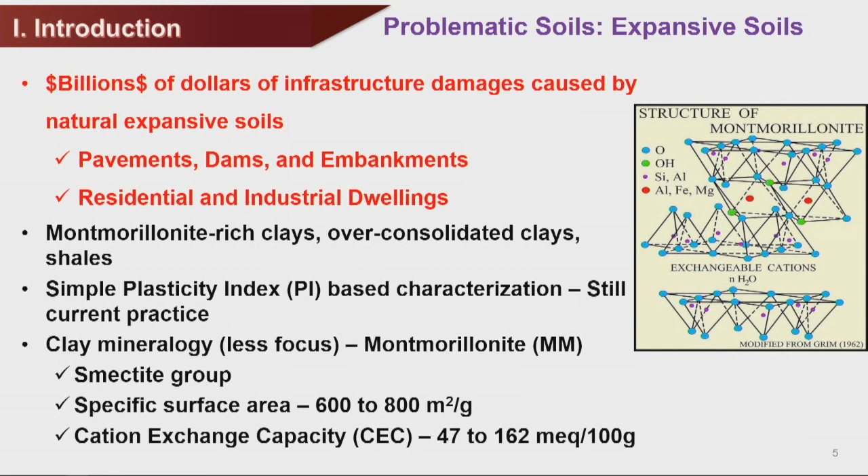So you're going into soil chemistry. The one that's very important is the montmorillonite mineral, which is part of the smectite group. You see the specific surface area, how big it is - a few grams can spread across a whole football field. You'll get this from the Mitchell and Soga book, which is very true with this material. So anytime you have a montmorillonite mineral in your soils, you are talking about some extreme problems, and high cation exchange capacity also. So these are some pictures.

A lot of times people ask me, 'Anand, do you think I should buy a home in this region?' I say most engineers can address your problem, but it's better to drive around to see what type of roads you have, then you get an idea whether it's a bad area or not. If you do have a bad area, you don't stop buying there - you can still come up with a better foundation. In fact, that's what I did for my own home's foundation - I was able to improve it a little more by doing some testing in my lab. So I'm very proud of that.

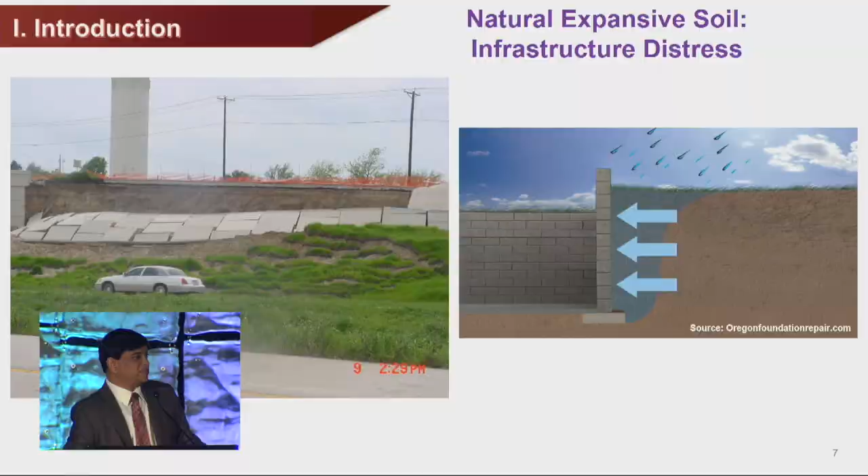One year we had a wall on I-30 near Dallas that moved a few inches, and Barry Christopher was involved in the design and the investigation. That lane was closed almost 4 months and was a tremendous problem because it caused a lot of traffic delays for morning commuters going to Dallas. Again, this happens because of the soil behind there causing swelling and movements.

Unfortunately, the repairs are very simple - they just push the soil back, compact it, and leave it. Then in 2-3 years you'll have another skin slide again, so it's not a very good permanent solution. So we did some research with the Army Corps to address this problem.

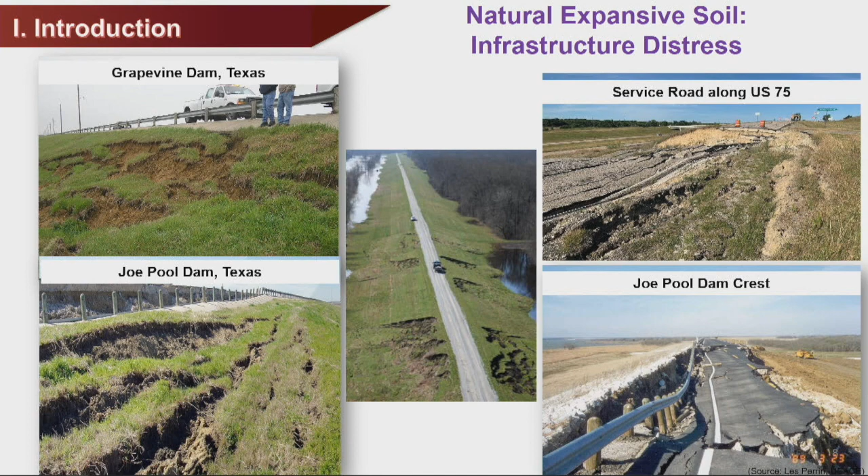So the one you see on the right-hand side is Joe Pool Lake. That crest completely collapsed several years back because we had cracking. The cracking went all the way to the crest, and it caused the failure of the road on top of the crest of the dam.

And then there's another type of expansive soil. This problem was first mentioned by Professor Mitchell in his Peck lecture, and also in his Terzaghi lecture, where he talked about parking lots in Kansas having this heaving. Subsequently, a lot of other folks have done work on it, Hunter, Little, and several others.

So basically, this one came from sulfates. If you happen to have any of these sulfates in your ground and you stabilize them with cementitious materials like lime or cement, instead of making them less expansive or more strong, you're actually making it worse. These minerals will react with your soils and form a compound called ettringite, and that ettringite is a very, very expansive mineral. It can lift even concrete pavements badly.

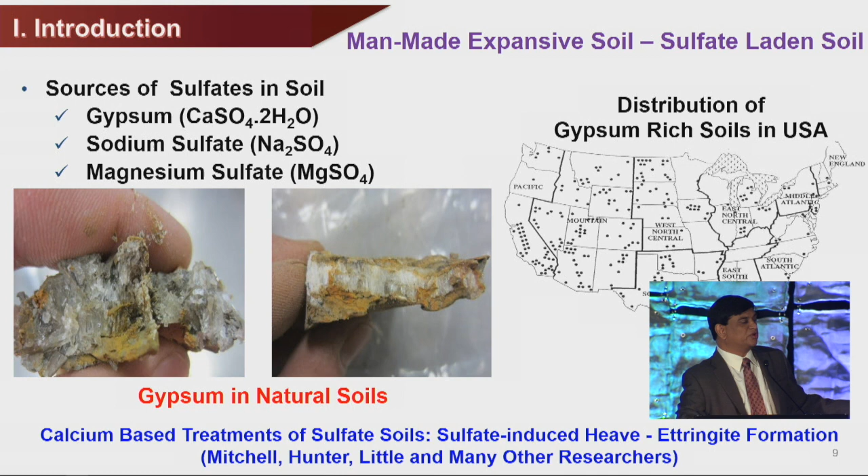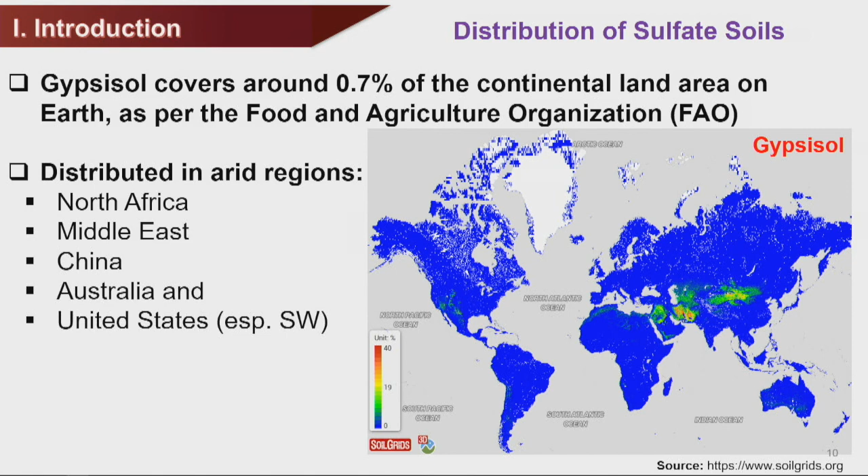I recently gave a talk in Paraguay. Some parts of Paraguay have a lot of these gypsum soils, so the roads built there have huge amounts of heaving problems. Some of our research in Texas is actually addressing this issue. Again, this is not just confined to the U.S., it's a worldwide problem. You can see gypsum soils all over the major continents. Later I will show you more.

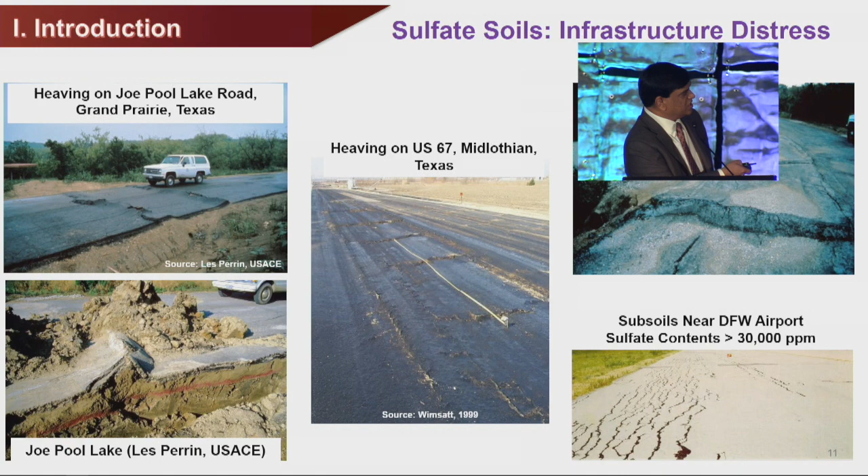But this is some of the pictures of this sulfate heaving, what we call it. You can see here in this picture, this is just during the curing process. There is a small heave that happened right after a few days, in this case 3 days. So the heave actually is your sulfate heave. They go back and rework it, but it can restart again.

This particular one is the Joe Pool Lake Road. Again, this road is an Army Corps road. It's not a very thick road, but within 6 months, this was damaged. They had to spend $400,000 to repair this road.

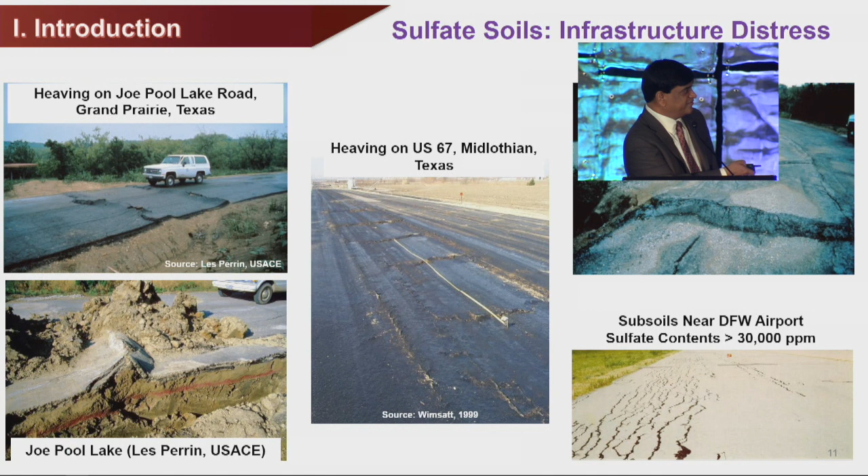And this is not just roads, even runways have this issue. This is DFW Airport taxiway. The taxiway has a lot of cracks here, a lot of differential heaving, all happened because of sulfate soil. So again, this is another major expansive soil, but I call this one man-made because it came from stabilization of the soils with cement or lime products.

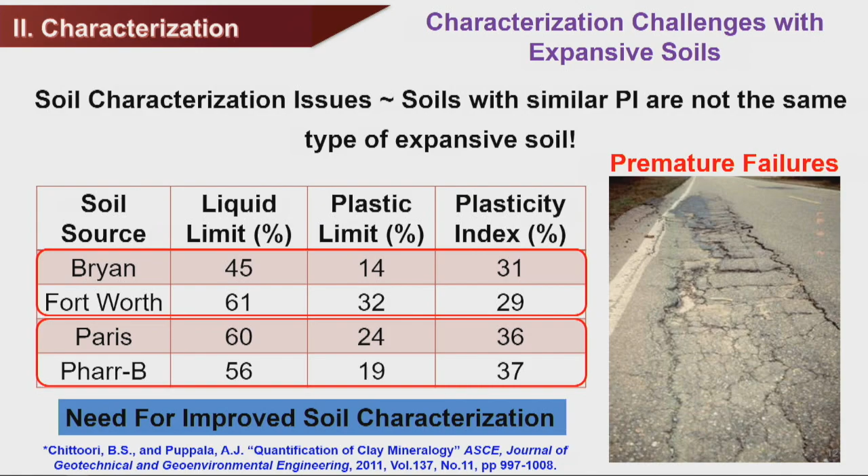Same thing, two soils here. This soil source came from different districts in Texas, again Bryan district and Fort Worth district. Later you will see these are not the same soils, they're different. That's something based on clay mineralogy I can tell, but if I just do plasticity index, I completely miss this picture. So that's where I think it's important to show that we really have to improve our soil characterization.

So this is the second topic of my focus. One of the things we did is a 3-year NSF study, and a couple of students here, Bhaskar Chittoori and Anand, they all did this work. Part of the work was done with Arizona State University, my good friend Claudia Zapata, as a collaborative project.

So what we did is we took several soils and looked at their clay mineralogy, and you'll see how we did that. Then we also did mercury intrusion porosimetry. And then we did on-site testing on the soil water characteristic curve, which is important, you will know how the moisture is propagating or flowing through your soil.

And then we did the macro testing of swell properties. Again, there's a lot of fundamentals involved here. We are looking at the micro level, porosity, and how the clay mineralogy interacts with water, and how it causes swelling.

So this is the thing. One of the things that came up is we came up with some models. This is more intensive work because you have to include some additional testing, but in my opinion this will help. Unfortunately, most of the time when we have a failure we do it forensically, we do all these things. We don't do it at the time of beginning of the design.

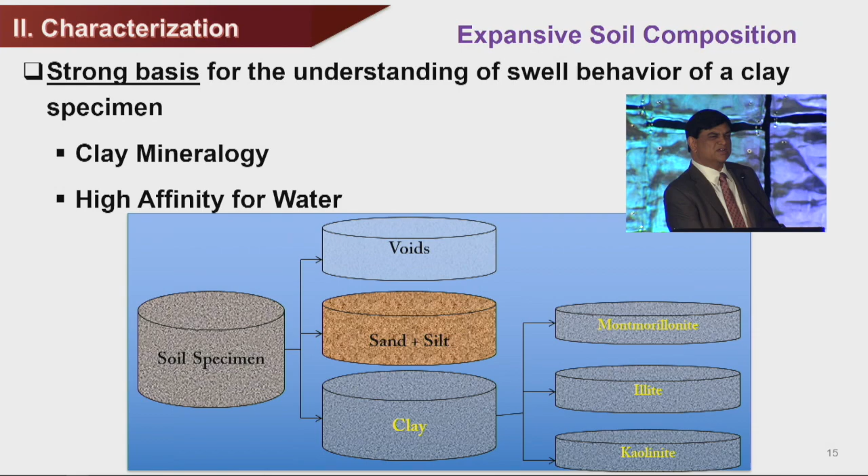As you know, this montmorillonite is highly swelling. This is low swelling, so you have different swelling index. So if your soil is rich with montmorillonite, obviously you can expect swelling. But if it is rich with illite or kaolinite, moderate swelling. But mostly kaolinite, predominantly, you do not have a major issue. It won't be a swelling mineral, swelling soil.

So the one thing we did is with Bhaskar, he's now at Boise State, we looked at this mineralogy. And this came from Mitchell and Soga's book. They have identified the range of properties. So you can see all the cation exchange capacity, specific surface area, and potassium.

One thing I want to mention here, the potassium main source is, again, for illite, comes from potassium. And that's what we thought. But believe it or not, there's another type of feldspar, which is potassium feldspar, that can contribute to kaolinite. So we had to make some corrections later. So initially, everything we thought potassium is going to lead to illite mineral, but there is some part of potassium - this is from my geology friends - I learned it can actually come to your kaolinite also.

But it's a very small amount, and very few places have this potassium feldspar. Unfortunately, Dallas geological formations have potassium feldspar. So I had to go back and make those corrections.

So basically the equations are straightforward. You measure these three properties: CEC, SSA, and total potassium. And again, we have published quite a bit on this. If you are interested, please send me an email. I'll be happy to share these procedures.

So then you solve these three unknowns, because the unknowns are kaolinite, illite, and montmorillonite, and then you get the three unknowns can be solved. But if you look at it here, there's a range, so you do not know which ones you are. So we developed an optimization Microsoft solver program. That solver program can feed your measurement data, and it will provide you approximate mineralogy.

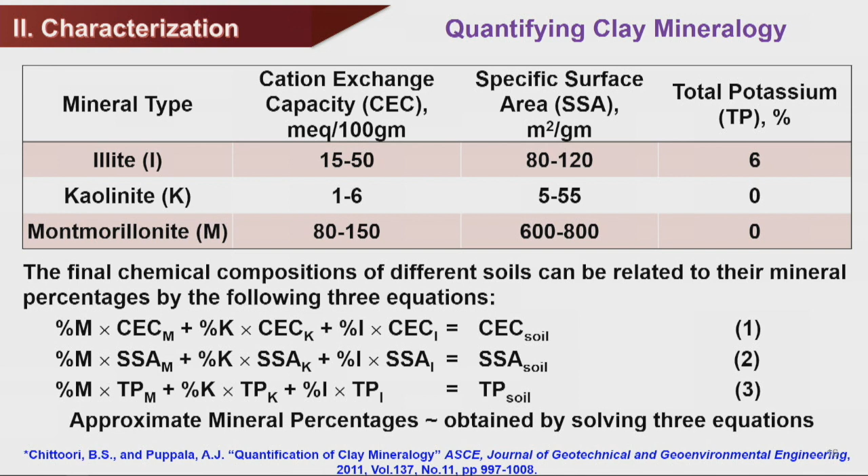Using these three properties, so we have a way to measure it. There's other ways you can do it - you can do X-ray diffraction Rietveld analysis. There are several folks who use that. Again, in my opinion, this measuring of chemical characteristics is a little bit more rigorous, but it also provides you more reliable information.

So some of the models we did, like one of the models I'm showing you here - what we did is we looked at our clay mineralogy, or chemical mineralogy fraction. So what you see there is the equation. This is the only few equations you'll see, you won't see that many equations, but basically we looked at the clay fraction here.

So this is our swelling factor. As I said, most of the swelling comes from montmorillonite, that's a 90. Illite is 9, kaolinite is 1. So if you take 100, we normalized it 90 to 1. So basically, if you have high montmorillonite, the swell factor SF is high. So that's our parameter for what we call the chemical parameter. The second parameter we included is, again, the mechanical hydro parameter.

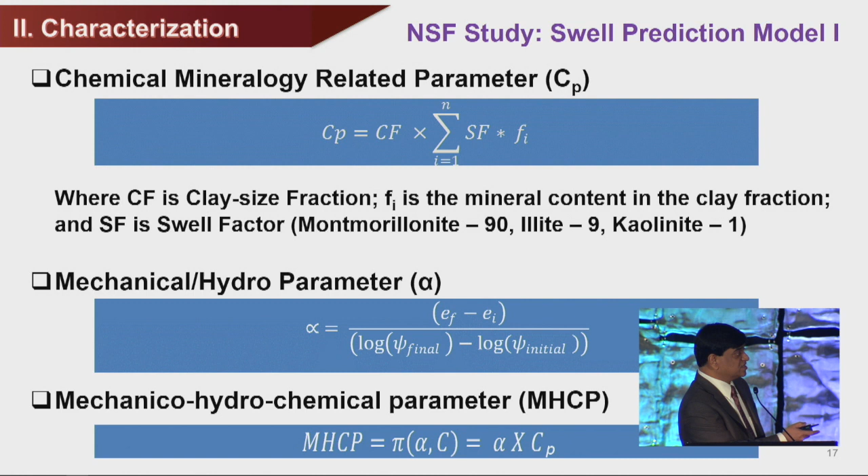We do SWCC, soil water characteristic curves, and also account for void change during the process. We used the slope of this curve to get the mechanical hydroparameter. These factors are not separate; they should be inclusive, so we used a PI formula. This is our equation for them.

On this x-axis is the parameter we measured on soils taken from all over the U.S. - San Diego, Denver, and other places where we know expansive soil exists. We collected and studied them in this research. The x-axis is this parameter, the y-axis is our swell test, and there's a decent correlation.

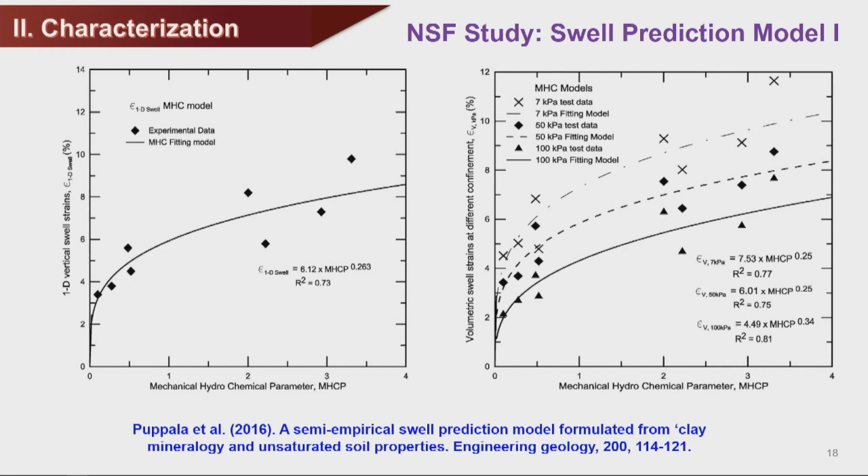We felt that by including clay mineralogy internally, and also the pore distribution and water retention properties, you can improve your characterization of them.

Then I go to another model, which uses mercury intrusion porosimetry. We inject mercury at different pressures so we can measure micropores, mesopores, and macropores. That's important because in soil that's predominantly clay, water moves through these pores, so you need to know which size of pores you have. We characterized all the samples at two different density conditions.

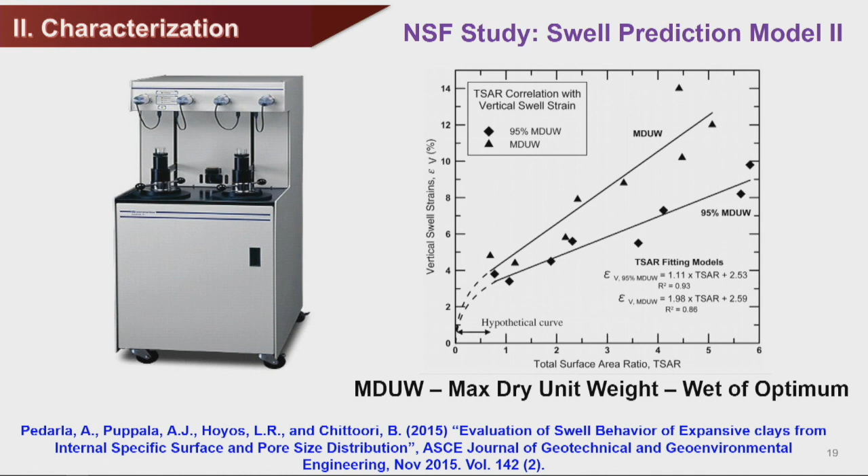We measured something called the ratio TSAR - total surface area ratio. The way it works is: your soil has a lot of minerals inside, and also a lot of pores. The water has to go through the pores, assuming they're connected or saturated, and then it should be touching your clay minerals.

From the clay mineralogy method I showed you, we're able to identify the percentage of each mineral. We calculated how much surface area of the whole clay fraction we have, mostly interested in montmorillonite. Then using MIP, we looked at the pores that will be filled with water, and came up with a ratio.

That's the ratio - if you're interested in this paper, please look at Engineering Geology, it's published, and ASCE JGGE also published this paper. In both cases you can see the correlation: the x-axis is that ratio, the y-axis is our macro parameters, measured parameters, showing decent correlation. We can develop robust correlations for better swell characterization.

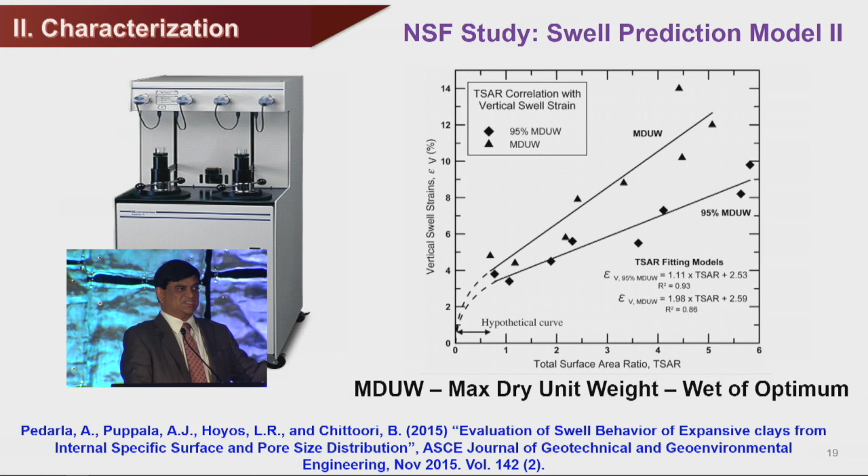Obviously we are asking more from your testing - you need mercury intrusion porosimetry. Where do we have that? We don't get access everywhere; mostly universities have this research access. But real practice integration will take time, because I expect this to take a while.

If you look at the quote from Professor Peck: research, whatever we develop, needs to be simplified into procedures so engineers can use it easily instead of doing all the testing. So a little bit of empiricism is needed. We need more database and more testing so we can come up with a way to correlate these properties, which will definitely help the practicing profession.

What I'm hoping is we can come up with better models that improve our characterization. Right now, unfortunately, we only act when there's a failure - if a road fails, we get the sample and I'm asked to find the clay mineralogy. I'm hoping we'll do more before we design that road or dam, so we can characterize them beforehand. With time and more database, we can develop equations that can be simply used in practice with a little more testing data.

So I want to go to the case studies. Before I do that, I would just want to give the quote again: the most fruitful research grows out of practical problems.

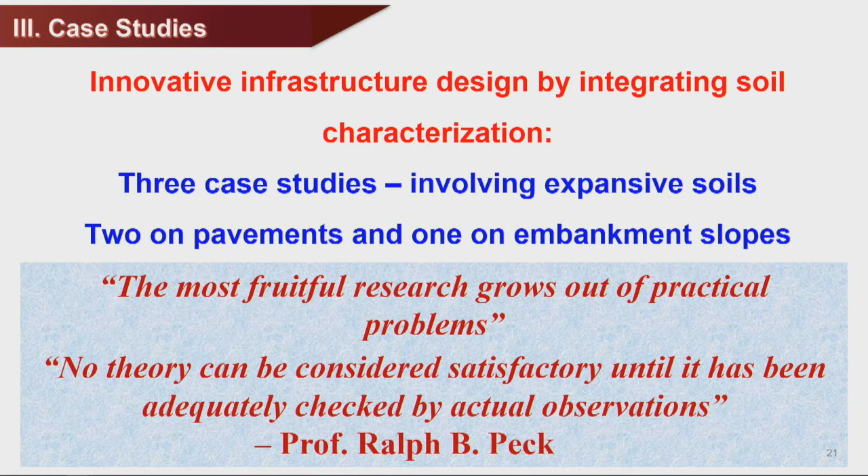So many of our works are well defined by practical problems. Every one of our research efforts is leading to solutions that improve the sustainability and resiliency of our infrastructure. In expansive soils, we are working a lot - Professor Briaud, Professor Lytton, Professor Little, Sandy Houston, Bill Houston, several folks, Professor Ray - all of their works are pretty much going towards practice.

So there are a lot of things we do that actually lead to implementable research. I want to show you three case studies, two on pavements and one on slopes, all dealing with expansive soils.

So I'm going to start with my first case study, again expansive soils. Typical practice is mostly chemical stabilization, using lime and cement. Lime is probably 70 to 80% of the market for stabilizing expansive soil. Cement is also used, and in some cases provides better strength properties. This is quite an interesting practice.

And then you also see recently a lot of interest in geosynthetics. There are some types of geotextiles that are used. We're looking at one of the geotextiles to remove moisture from the subsoil so we don't have heaving. So there are a lot of interesting ways to stabilize it.

So the one I really focus on here is chemical stabilization. This project is funded by the Texas Department of Transportation, a joint project with UT El Paso, with Soheil and our team. We got soil samples from different districts, and each soil was characterized with the methodology we developed.

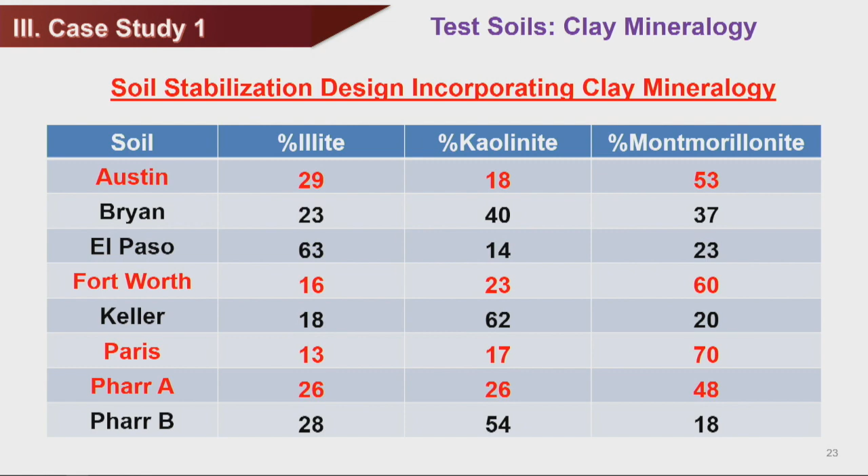So that's an important identification. One of the things we did, if you went with the design, is really going to open up your eyes. If you recall, I showed you this slide where we have the same PI for these two soils. Now look at the dominant mineral. Bryan, where I am now, we have a better soil, a kaolinite-rich soil.

Again, you may find some areas where this may not be valid, we only did a few studies. But Fort Worth definitely has a lot of pavement issues, and montmorillonite mineral is very dominant there. The second one is Paris. But if you look at liquid limit or even liquidity index, it will be better than just relying on PI. This explains why we should move a little away from PI-based design.

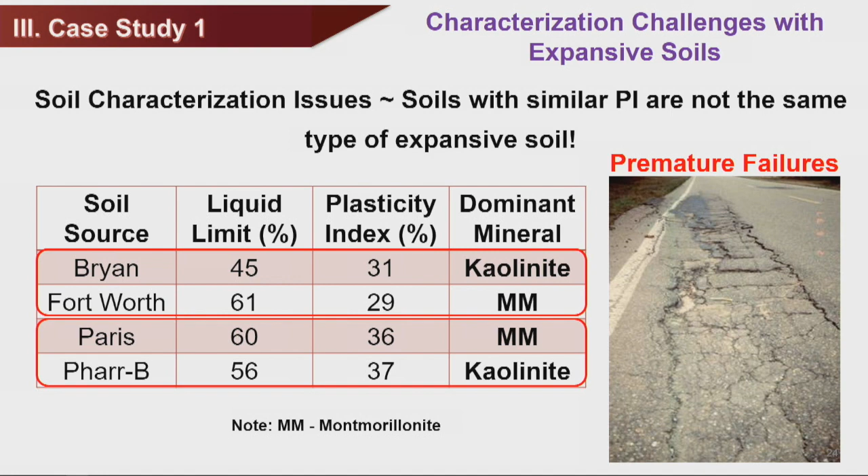So this is the PI-based design. A lot of times the stabilization guidelines, like this highway agency design, look at your PI number and come up with recommended treatments. Anytime you're talking about 15 and above, up to 35, lime is very common and most times recommended. But when you go above PI of 35, you're talking about soils with high montmorillonite, so you really have to look at it a little differently.

So what we did, on all 8 soils I showed you, is come up with a lime stabilization design using the Eades and Grim method, which is a pH-based method. Each of them we came up with 6 to 8%, except for one district, Pharr, which only uses 3 to 4% per district practice. So as part of the project, we only did 3 to 4% for this one.

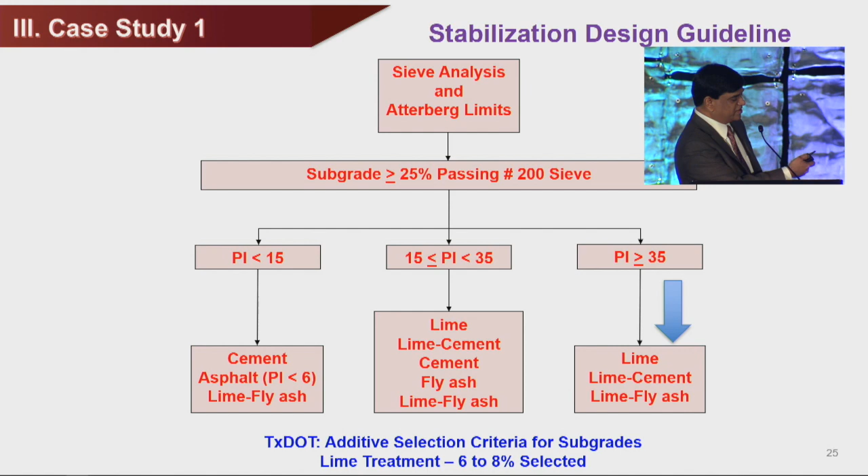So let me show you some results. We did the stabilization design, mixed the soils with the chemical, and then did all the swelling tests and everything. At the beginning of the design it worked very nicely. But when the roads are built, they are in the field and exposed to seasonal changes.

So you really have to do a durability test, mostly wetting and drying. If you're in Minnesota, you have to do freezing and thawing. But now with a small area you may have to do all four. North Texas fits into that area, with a lot of cold seasons, so we had to come up with a new procedure that includes wetting, drying, freezing, and thawing. I don't know if that's the worst case scenario, but sometimes after freezing we see a lot of road issues.

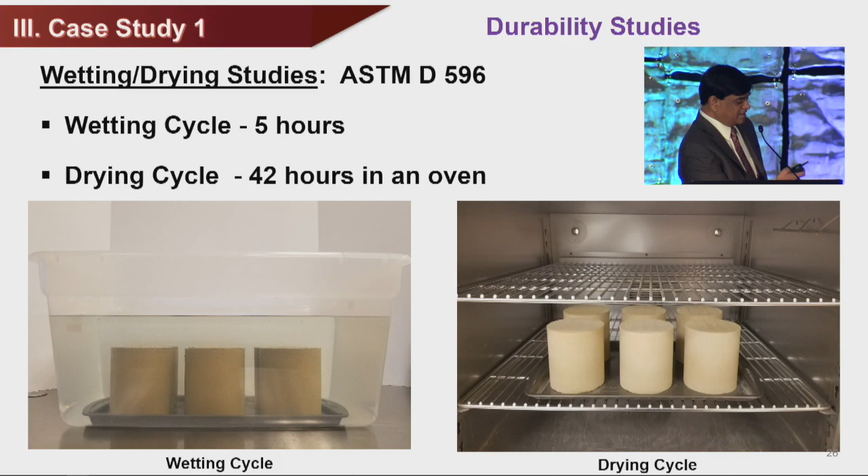So in this case, it's wetting and drying. This is the ASTM procedure: 5 hours wetting, 42 hours of drying, so typically close to 2 days of testing. In each case, we tested them several cycles, and our target is 21 cycles of wetting and drying, to see how much volume change is taking place.

Every time we do wetting and drying, we were looking at the volume change. Plus, we also took some samples after certain cycles and tested them for unconfined compression strength, because most of the stabilization design relies on the UCS. So we want to see if after wetting and drying, the UCS stays the same or goes down. You will see some interesting results now.

The first one here is the Fort Worth clay. On top, untreated, within 1 cycle the sample collapsed. Obviously, no treatment, nothing holding it, so we have an immediate failure. The second one is after lime treatment, 6% lime, which did well up to 10 cycles. After the 10th cycle, it failed. So you may get a good performance for a few months to a year, or maybe a couple of years, then you may have an issue.

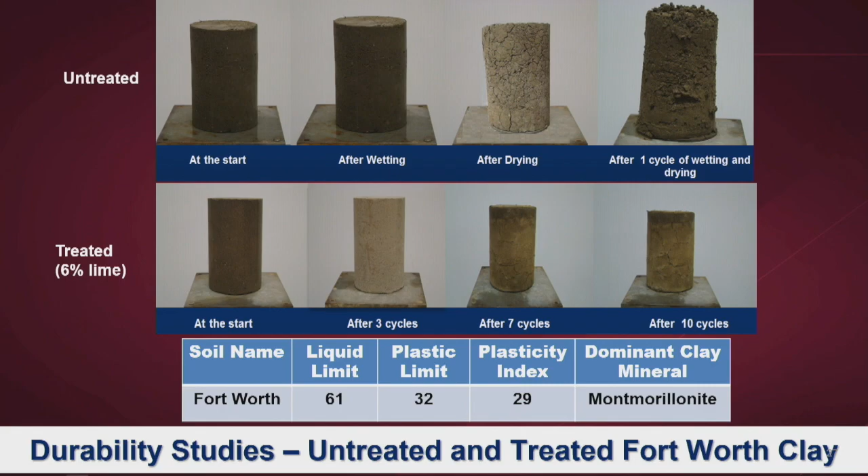So that tells you why some roads have problems in year 3 or year 4. This explains it's a slow process. It's not immediate, and it's not like 10 years or 20 years. Some of these mechanisms of swelling and shrinking will have a bad effect, but it takes some time sometimes.

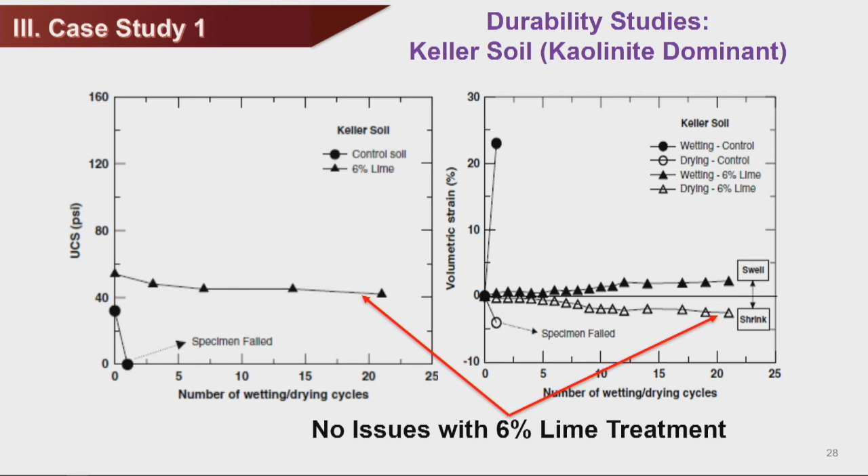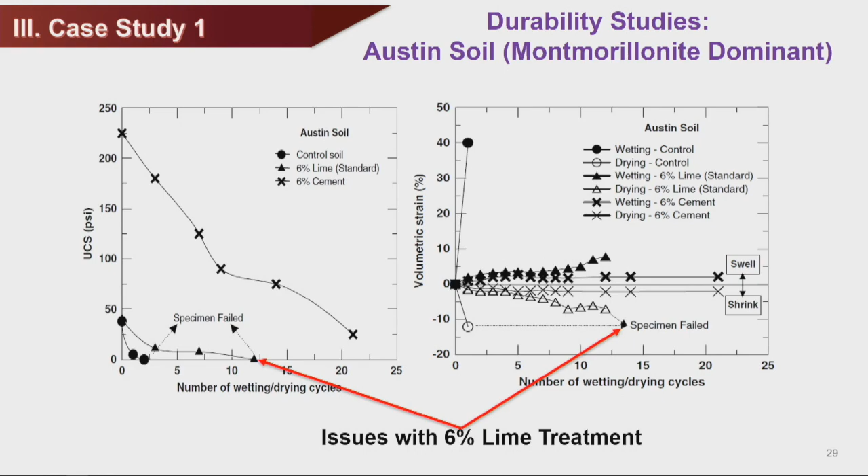You may want to go much higher than that for lime stabilization. A lot of current practices use between 6 to 8%. But that explains why a lot of times we have issues within a few years after surveys.

So this explains why sometimes you're sitting in a meeting where some districts say we never have a problem, but other districts say no, we have a problem. The reason is we are talking about apples and oranges - we're not talking about the same soils. Their characteristics are different. PIs may look the same, but they're not. You really have to look at the clay mineralogy.

So one of the things we did is come up with this modification in our design practice. We looked at the montmorillonite content, and if you have montmorillonite, you need to redesign - not only design with higher stabilization, but you may have to continue doing durability cycles. In some cases, we went up to 10%. Again, not a sustainable design because you're putting more cement or lime into the soil, but sometimes it's necessary because that structure is going to fail. Okay, so this is one of our first case studies.

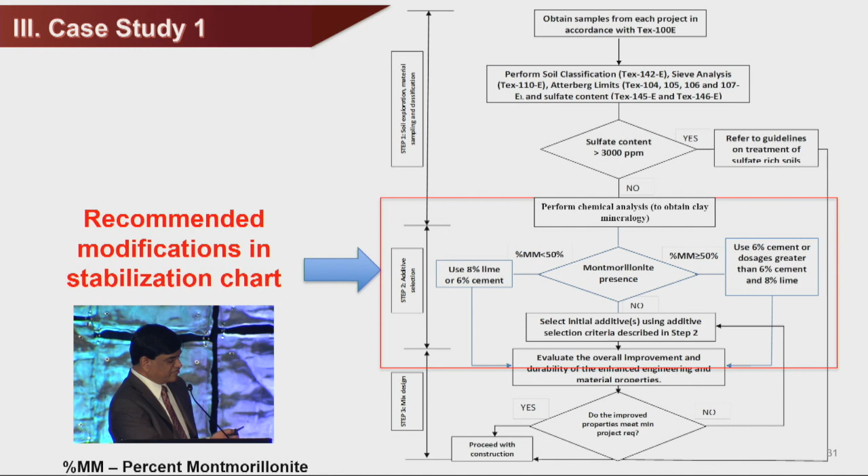My second case study is on ettringite soils, which I call sulfate-rich soils. This is where, as I mentioned, Professor Mitchell, and then later Dale Hunter, did wonderful dissertation work on this material. It's in Las Vegas. This is also published in the ASCE Journal of Geotech.

What they did is they looked at a road built in Las Vegas. That road is actually lifted by almost, believe it or not, 24 inches. Please look at the JGGE paper. You'll see how much heaving came from this soil that is treated with lime, all because the gypsum and lime reacted and formed a mineral called ettringite.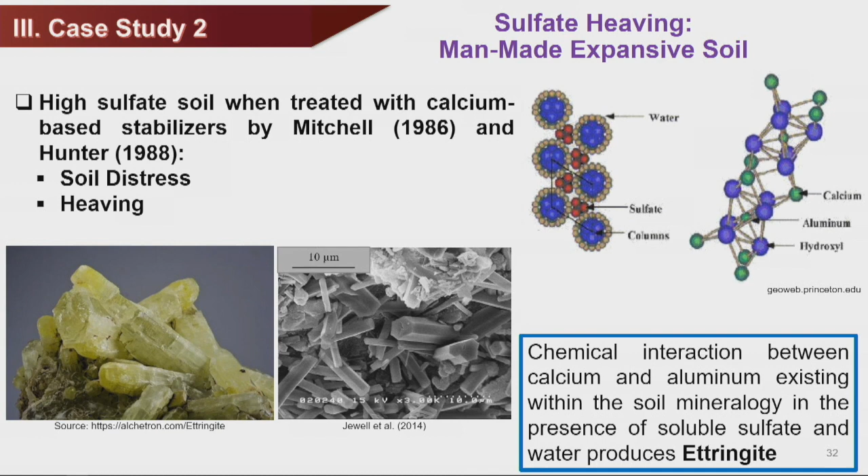This is the ettringite structure. Ettringite, chemically - did I say no more equations? But I think a few more chemistry equations, okay, though very simple ones. So what happens is why this problem starts.

The problem starts from this. Anytime you design a chemical stabilization, you are increasing your pH. At a high pH, your soil starts releasing alumina or silica. A lot of times, these will form with your chemical additives and form pozzolanic compounds. In this particular case, what happens is this.

You have alumina that comes out here, and then again this alumina starts reacting with the cement or lime calcium component, and it also reacts with the sulfate. This is the sulfate source. All these things, under the presence of water, give this compound, ettringite. Ettringite is a highly swelling mineral. It can cause huge amounts of heaving.

In the past, before Mitchell's lecture or even before that, they used to think it's coming from the underlying subsoil, but it's coming from your own stabilization, right underneath your highway pavement. So this is a major issue.

So now if you look at our current geotechnical practice in many southern or southwestern states, they include sulfate as part of geotechnical characterization. The problem is sulfates travel with groundwater, and their pockets are not uniform. So if I do just a few tests at 3 or 4 spots, I will easily miss the sulfate characterization. You need more testing for sulfates.

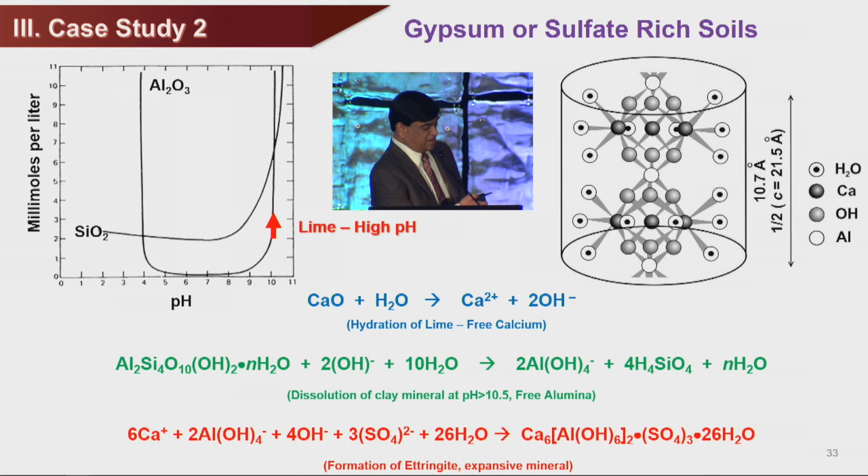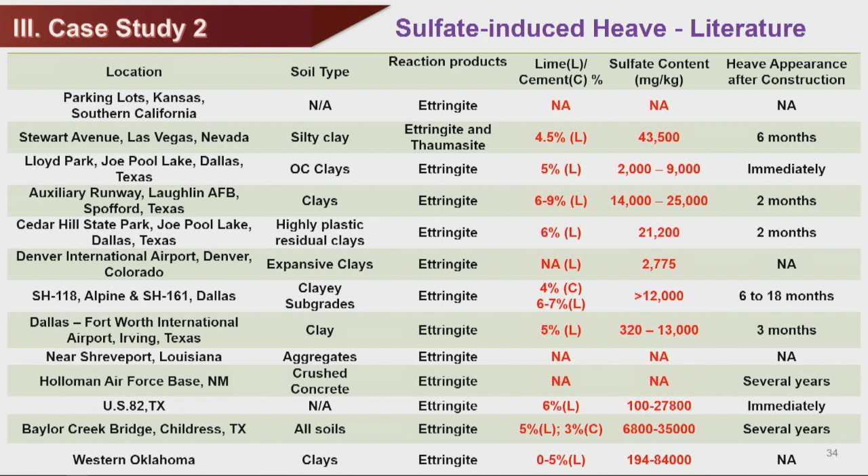It all depends on your compaction conditions. If you compact to high density, your void space is small. Then if ettringite forms in that void space, you can see the heaving effect at the surface very quickly. So it's all actually dependent on compaction conditions.

A lot of times I get asked, hey Dr. Puppala, can you give me a sulfate number? I say if I give a number, the egg falls on my head - because if I say 3,000, I have seen soil that has 1,500 having heaving close to 8 to 10% in the 1D swell testing. So I'm very careful. I will never just say the number; you have to do some testing to confirm it.

So the two things we did in our research in the last 12 or 14 years at UTA - we have done two types of tests. I want to quickly mention here, these are ones I call less than 8,000 parts per million. I won't vouch for this because, as I said, even 1,500 may have an issue. But we looked at several additives. GGBFS is being used even in the UK very successfully, and also type 5 cement. We actually have successful application in the real field.

We're also looking at class F, because class F is low calcium. Anytime you put low calcium, it actually improves it. So we came up with the different things that worked for them.

A lot of these studies are funded by NSF, Army Corps, NCHRP, and a US DOT funded study. We finished them. They're all related to this.

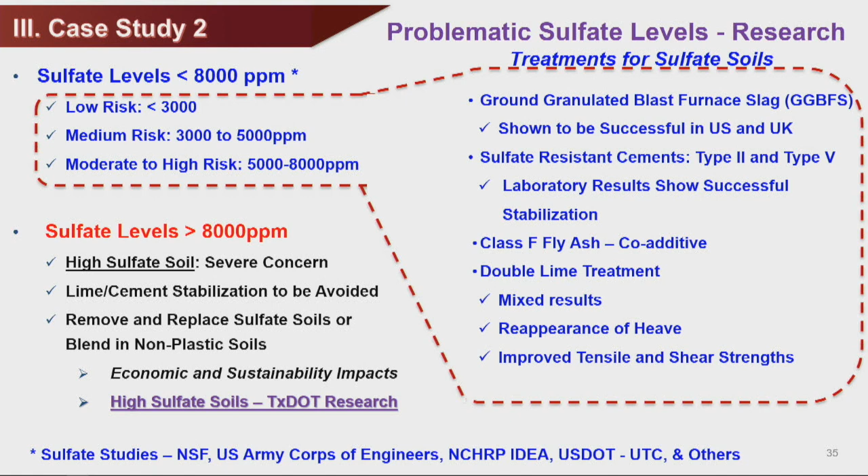But there are soils that have sulfates more than 8,000, and we have lots of them. So how do we stabilize them? Do we completely remove that soil and redesign it? So we have a study from TxDOT research.

We looked at them, and these are 6 different soils from different regions in Texas. There are a few that already have what we are looking for, but there are some that do not.

What we did is we spiked the gypsum. We added gypsum to create more than 8,000 sulfate levels. So basically, we manufactured some, but we also used some natural soils. There are 2 soils I want to mention, Austin and Childress. They have very high amounts of sulfate.

One thing we did is we came up with a traditional stabilization design, and then we wanted to use something called mellowing. Mellowing is typically when, anytime you do a chemical treatment, you let it soak for a few hours and then go back and rework the soil.

A lot of initial cation exchange capacity reactions can happen very quickly that can make the soils kind of non-plastic. That actually helps when you compact them. You may have a little bit higher void ratio, so you won't see the sulfate heaving in those soils.

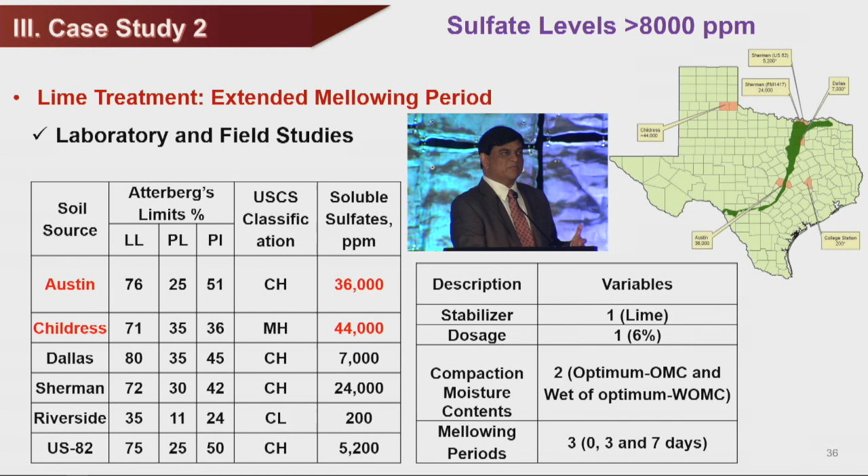So we wanted to see if using 3 days of mellowing, 7 days of mellowing, whether that would provide a better stabilization of these sulfate soils. So we tried different mellowing periods here: 0, 3, and 7 days.

0 is what's typical. But when you increase this mellowing, contractors do not like it. They want to finish the stabilization quickly. But in this case, if you do it quickly, you may have a problem where you have to come back and repair it completely. So it's something you probably have to wait for.

So there's some interesting results I want to show you here. Three of them: the Sherman soil and this riverside soil. If you look at here, the blue is your untreated soil, and then you have 3 different mellowing periods I mentioned.

These are the soils. Anytime this final value at 3 or 7 days is below this value, that means we effectively stabilized it. We were able to do that with mellowing 3 and 7 days. It worked for this soil, and it worked for this one.

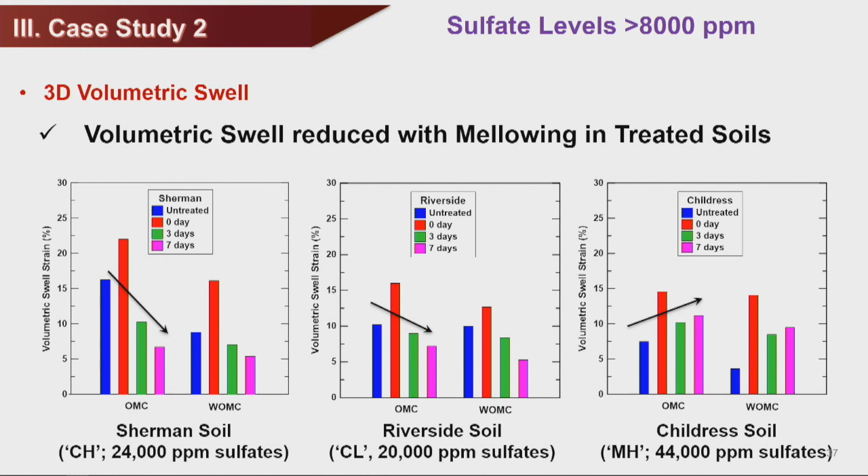But when we went to the Childress soil, it did not work. It actually started going up again. That soil has very high sulfate. So there is a threshold sulfate level at which we cannot use even mellowing.

So we went back and did some more investigation. We found that out of 6 soils, 4 worked very nicely with mellowing. 2 of them did not work. These 2, again, are the Austin and Childress soils. Austin has a lot of high sulfate soil.

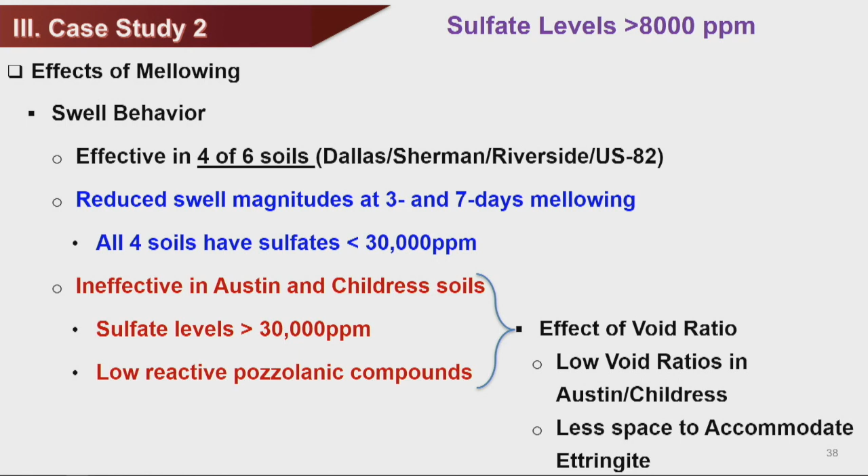When we did some more micro-investigations, we measured alumina silica. Unfortunately, these 2 soils have low alumina silica. We need them for pozzolanic reactions. You need calcium silicate hydrate, calcium aluminate hydrate. So when you compare these 2 to the others, it did not help us.

So we need pozzolanic reactions to counter sulfate heaving. Unfortunately, we didn't get it. On the other hand, if you look at the voids, these 2 soils after treatment have the lowest amount of voids. Compared to the other 4, you need a little bit more void space.

So sometimes we actually ask them to compact at lower densities that give more void ratio, for void space. The ettringite is like crystals that start growing with time. They will hit the soil particles in the void, and then you will feel it at the surface very quickly.

So again, we explained why it did not work. We feel anytime above 30,000 for high sulfates, you should probably look for another way, like geosynthetics and other things. I don't think even mellowing works well for those soils.

One of the things Professor Peck always emphasizes is checking the validation. This we did in the lab. So we have a test site in the field. This is the Paris district because, as I mentioned, they have very proactive research folks. They actually give us test sections. This is our test sections.

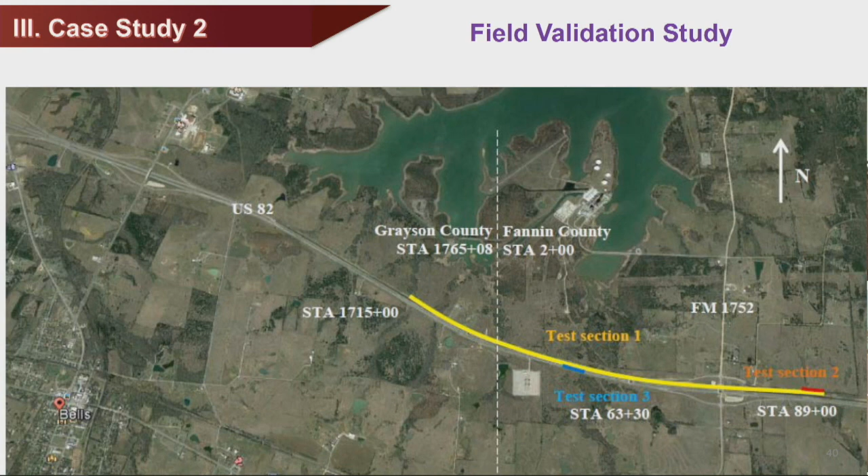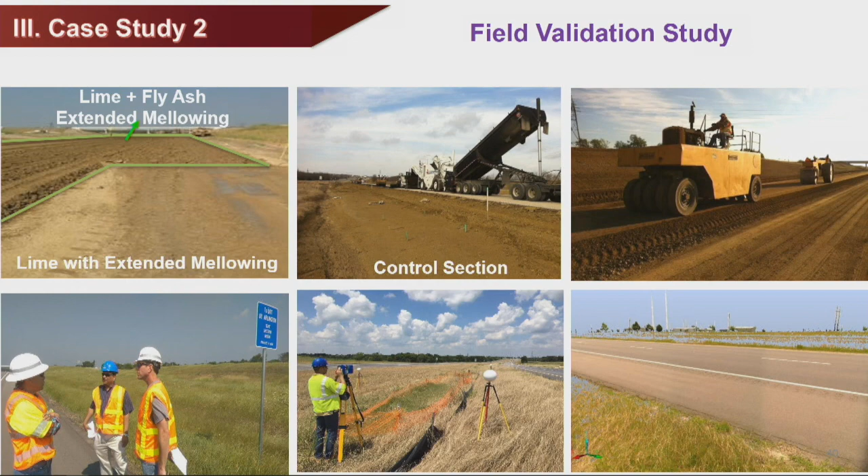We did both with extended mellowing as well as fly ash, and constructed our test sections. They nicely put our test sections where we had to go and collect the data, done with extended mellowing.

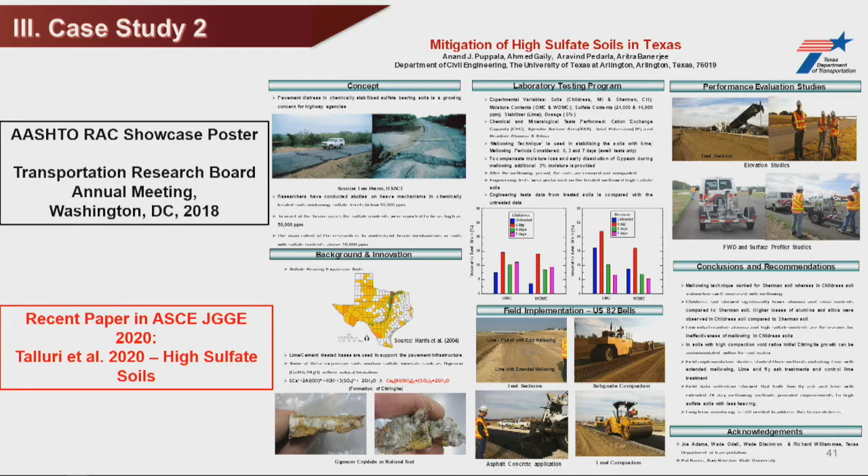Two years back, our research project was selected by the Highway Agency to showcase at AASHTO. AASHTO showcases research that is most implementable or practical so it will have wider dissemination. At the TRB we did the AASHTO RAC, and at the material section they chose our project to show. This is our poster, showing what worked for us. We clearly said that after 30,000, we did not find any other method right now that is effective. But other materials may work, including nano-silica or pozzolanic compounds, which we haven't investigated yet. Hopefully more will come.

So I'm going to move to embankments, dams, and slopes. That committee, EDS, Tim Stark is somewhere over here - that's his committee that nominated me for this, so I want to try to please them. So this is my case study on embankments, dams, and slopes.

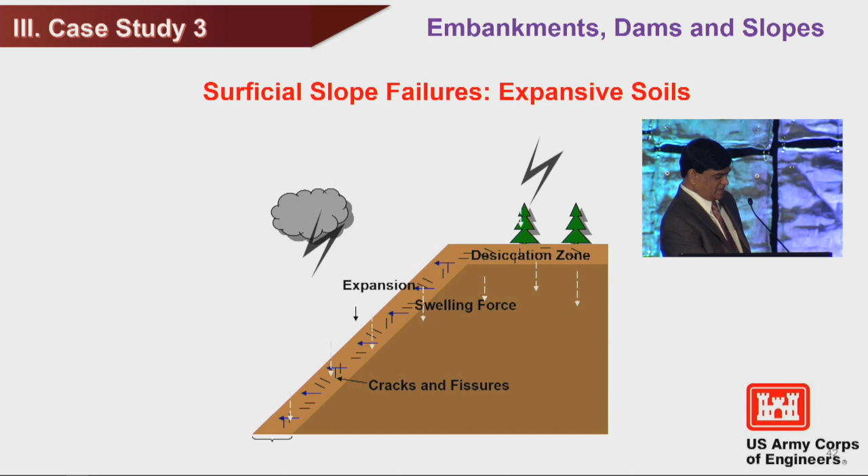You may have a better video, but basically we have a lot of embankments made of expansive soils. You have sun, and you always have cracks develop superficially - you'll see some cracks later. Then the rain comes - this is a poor simulation, a long time back - and the water goes in, then you have soils that move in. The next thing that happens is we have a lot of skin slides like this. These are lots of skin slides we have in our region.

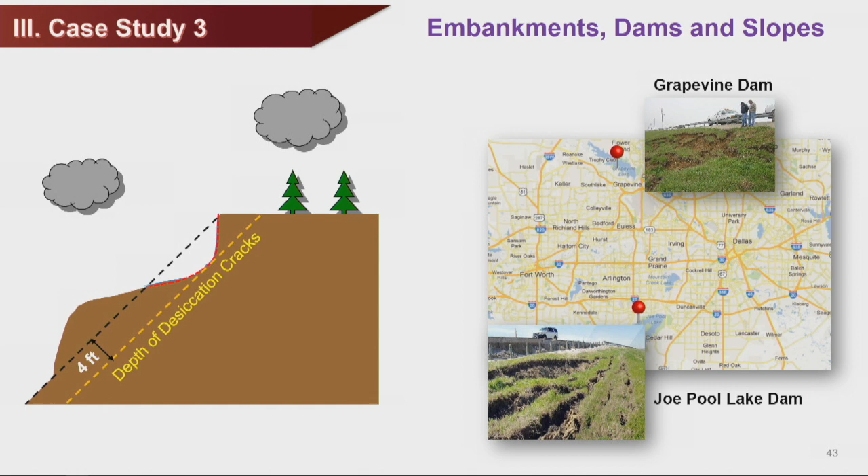This is the Army Corps project. They funded a 5-year project for us to try different techniques. You can see there are 2 dams, both very close to my campus at UT Arlington at that time - Grapevine Dam and Joe Pool Lake Dam. They both have huge amounts of these superficial slides, so we studied different methods here.

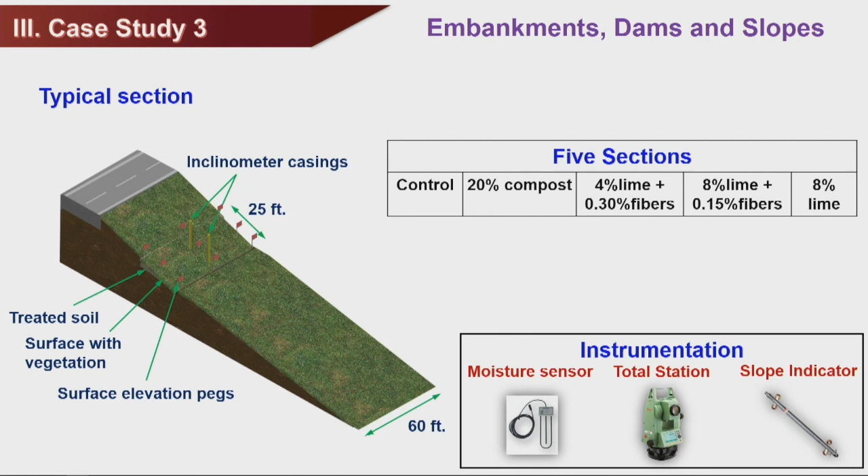Here are 5 different methods, including control. We studied compost, which is biosolids. Why did we study compost? Compost is hydrophilic, so we thought being close to the surface they may absorb some moisture. If you increase moisture by 1 to 2% near the surface, that will cut down your cracking. That was our goal. It did not perform well, but that's a different story.

But then we also studied lime with different fibers. In each case we instrumented - we have all kinds of inclinometers placed, moisture probes placed.

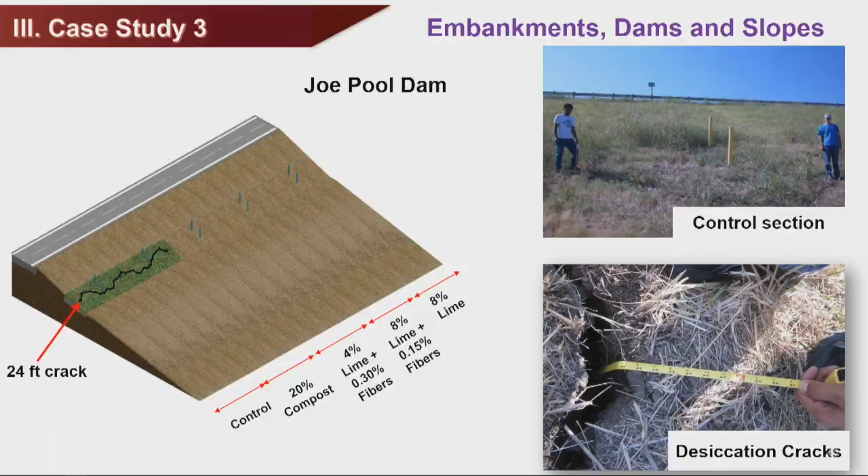The 2 areas where we have cracks, you can see the cracks - huge amounts of cracking on these dams on both sides. So we have cracks on control and compost. We did not have cracks on our treated soil section, which we expected because lime treatment increases your shrinkage crack resistance, and fibers add more tensile strength. One issue when we did this project was how effectively we can mix fiber with lime in the field, because fibers are discrete - how can we mix it, can they blow away from the wind? We tried to do this - we were able to do everything at the toe of the dam, move the soil back, and compact it to specifications.

So these 3 sections in our study really worked very well. We also did a lot of other things, including slope stability analysis, where we did all kinds of shear strength testing - residual, fully softened, everything.

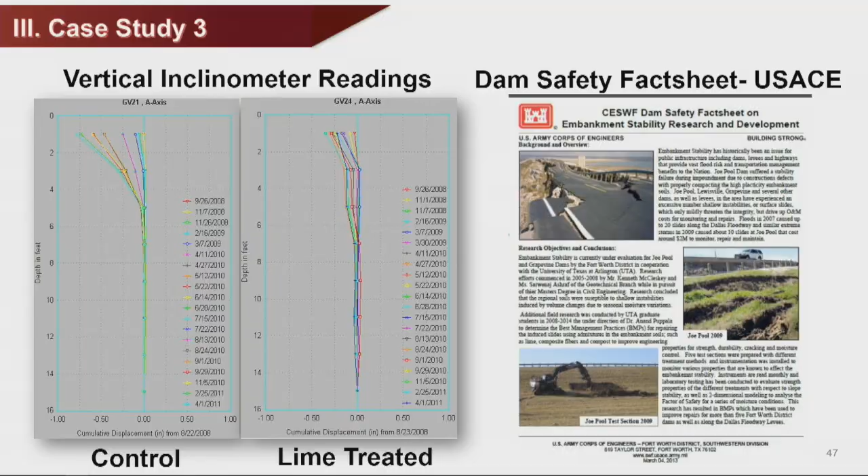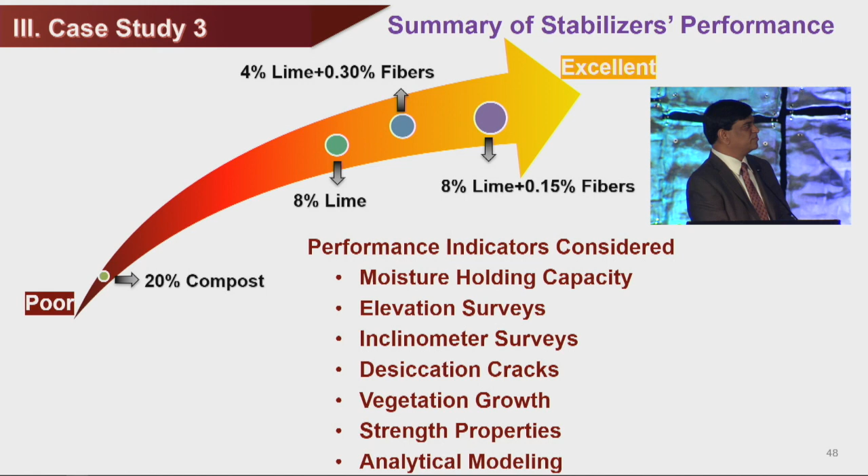Several other folks have used this technology to stabilize soil. Very recently, we applied this technique of stabilizing with lime for a highway slope, which I'll show you quickly. The three top performance indicators are the lime treatment, which is a chemical treatment. Basically, for expansive soil, if you want to cut down the cracking, you need to chemically alter its properties. So we did an embankment, as I mentioned.

This is a big embankment slope along US 75. This failure, if you see this picture, December 2017, they had to shut down this road. This is December 2017, and then you see this failure in 2018. It took away a whole section. This failure went on the other side also.

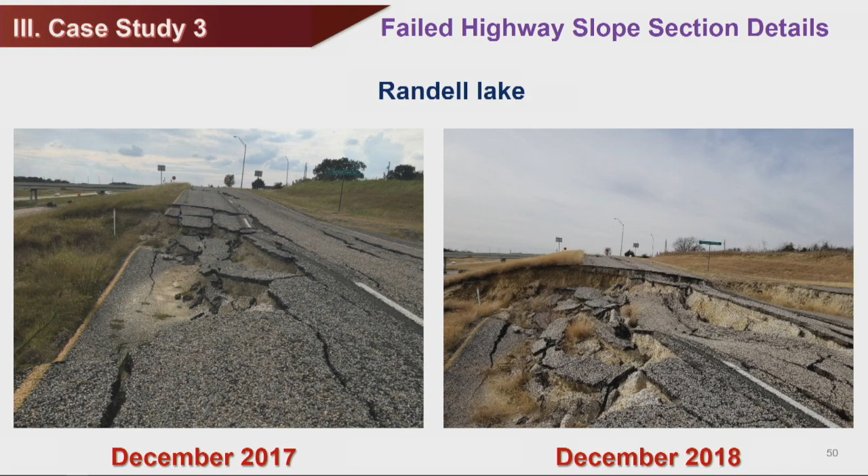So we came up with a laboratory design for them. This is an interagency project we have done. It's a 35 feet height embankment, 3-to-1 slope. You can see the swell properties are pretty high, so it's a shrink-swell soil. One of the things we did is we needed to really alter the properties. During the site investigation, we looked at it right next to this highway that failed.

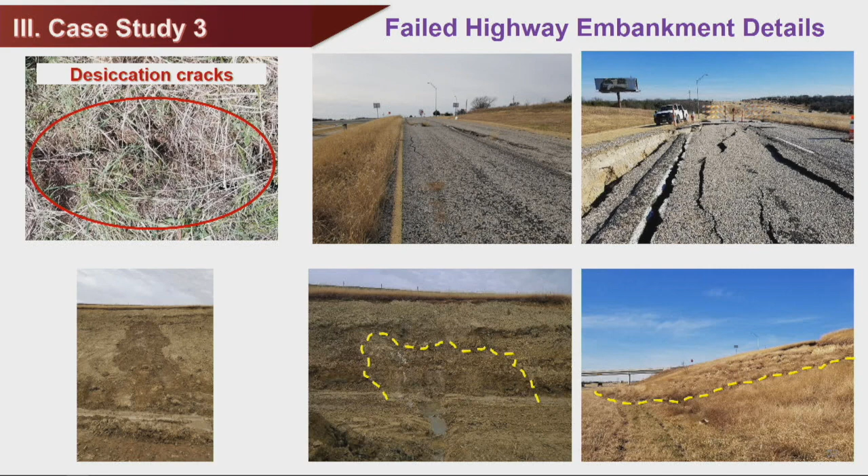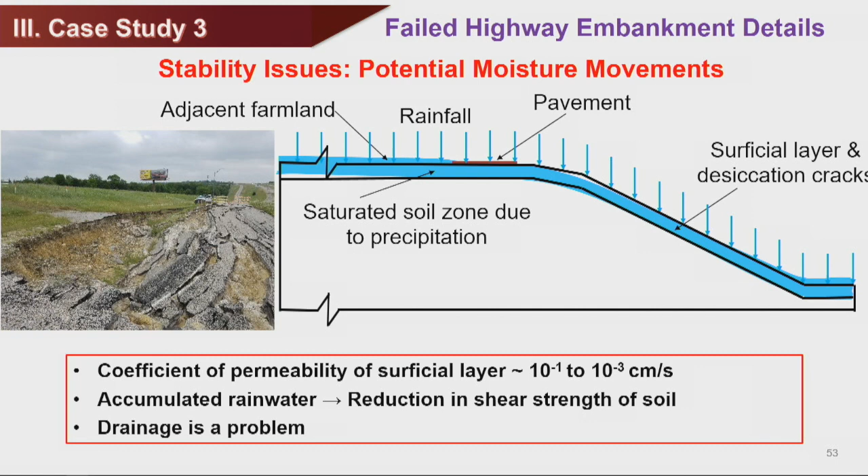Right next to the highway, there's a farmland. There's a lot of watering of the plants coming directly here because there's a cut section and a road here. So we see a lot of water coming out, and we thought we need to really take the moisture out. We looked at all these parameters and felt like anything that comes from this farmland water, we need to see how we can drain it. So our design is just finished, and now they've finished the construction also.

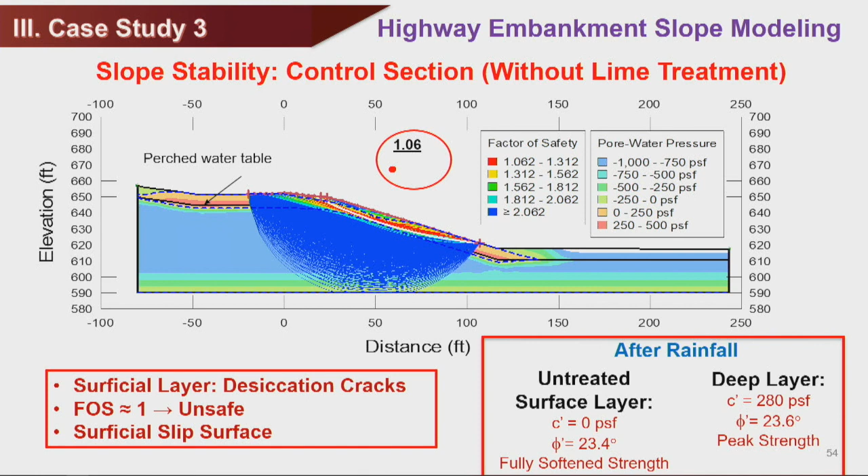When we did the slope stability checks, untreated soil without any lime gave us 1.06. After the lime treatment, we did the design again. You can see the stepped section. The reason we did stepped is you don't want to put two different materials together, one lime treated, the other natural soil. There may be a kind of slippery slope that happens. So we did the stepped type of construction.

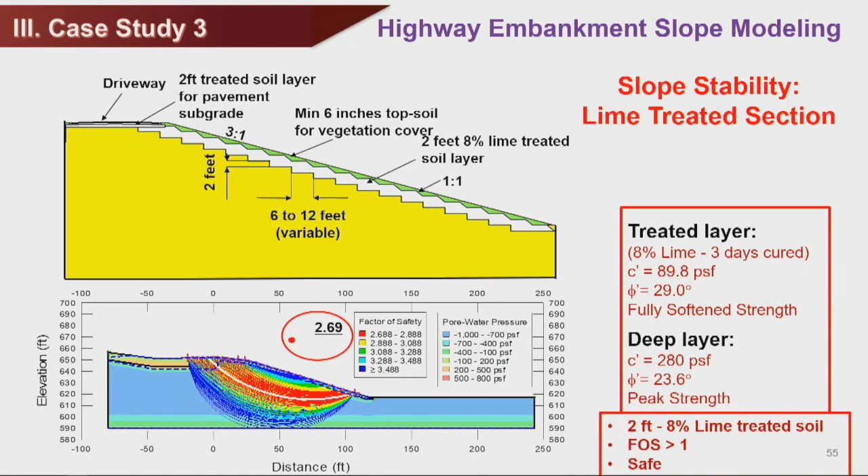Just now, very recently, they finished a major part of it. There's still a few more weeks left to finish the project, and then we are instrumenting and monitoring. Barak, one of my PhD students, is instrumental in this project. We felt like this design is going to give them a better life. So we did mention about the drainage.

One of the things I can say is the drainage is taken out here. This is the construction, these are last month's pictures. It's ongoing right now. The important thing, as I said, is the benching, and it worked very well. One reason we had to take more time is the other side of the road also failed, so the whole agency was repairing using our procedure.

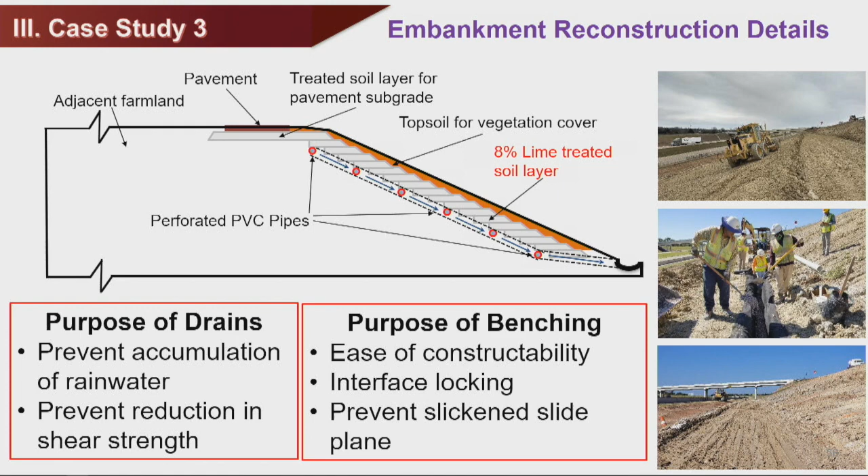So our part of this whole thing is design, coming up with the options, drawings, and then instrumentation and monitoring. I have at least one year left, but I hope I'll get another year of monitoring because we are a little bit delayed on this construction. I hope it'll work very well for highway embankments also.

I want to mention a little bit about visualization. This is my fourth topic. Visualization is really, as Professor Ralph Peck said, we always have to use our eye. So visualization is kind of what you see is what you get. I'll show you a few things here, touching base with some of the visualization work we are doing.

I think visualization in geotechnical engineering is very important. You can see some amazing pictures or visualizations of a big mega city and what you have underneath the ground, and that will tell you where to go, or if you have to put a tunnel, where you exactly have to place it. This is something we've been working on. We can also do visualization in different ways. One project I'll mention is a dam, the Tarrant Regional Water District dam. It's an old dam, and a lot of dams have these issues. With the visualization, I can see where we may have an issue.

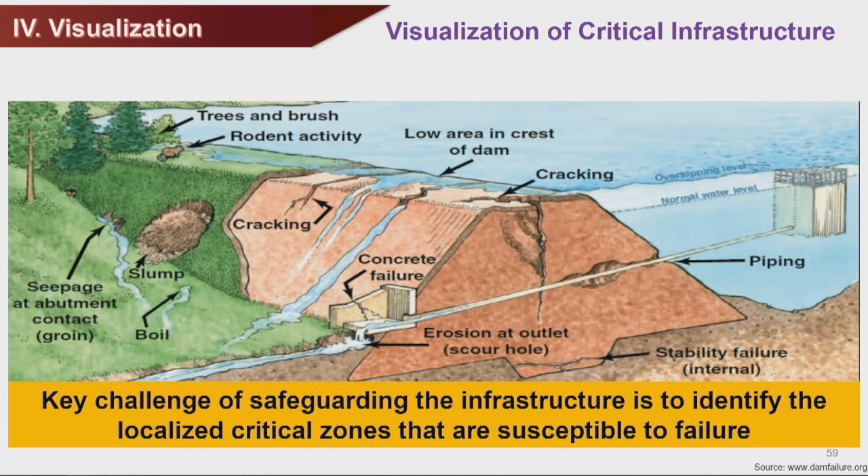So let me show you the one dam I'm going to talk about, which is a hydraulic fill dam. To give you an idea on hydraulic fill dams, the way the material is brought and placed in a slurry, the coarse material settles first, then finer material will flow.

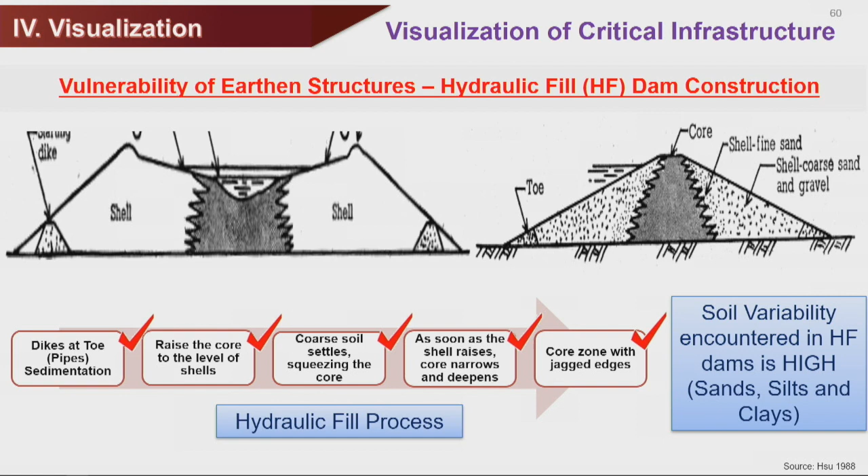So you have different ways of building the core, but a lot of times you don't get nice homogeneous sections. You get high heterogeneity, and that is something common with hydraulic fill.

So this is the dam where we have a nice project. One of the reasons we did this project is to check on the seismic effects on the dam stability. We don't have a lot of information on the construction records - it's from the 1930s. So PB, Parsons Brinckerhoff, did some work.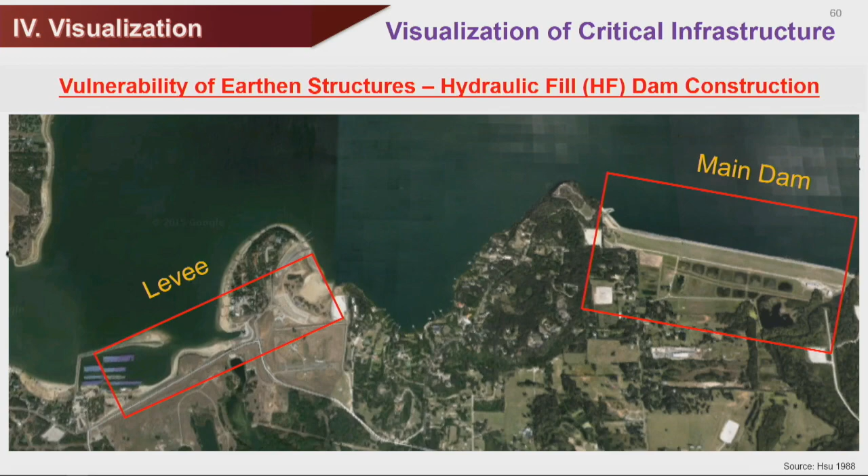They did a lot of CPT work, which I was also involved in at that time. So we did have a lot of seismic cone penetration or piezo cone penetration data. Paul Mayne will be very pleased to hear, being a cone head, this is very important. I was able to convince both PB and the dam folks to do a limited amount, and with proper plugging immediately, we were able to get a good amount of data.

So this is our typical CPTU data, and you can see you get your CPT properties. Then we did the Robertson method, so using Robertson you can get the soil behavior types. The soil behavior classification is given based on your tip resistance, you correct it for pore pressures, and then you get the soil behavior readings. So we use this to characterize how the hydraulic fill dam is built.

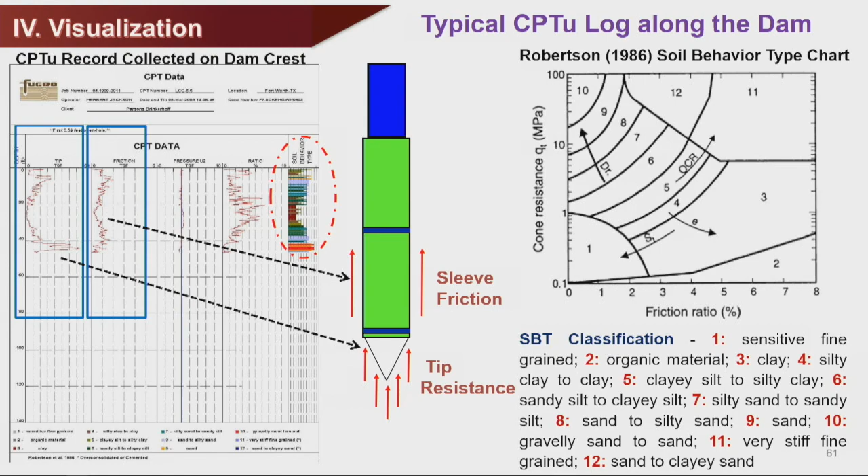So these are several CPTs along the crest. I'm just showing you the soil classification from the Robertson method. You see how much variability we have - we never have anything that's uniform along the whole crest of the dam.

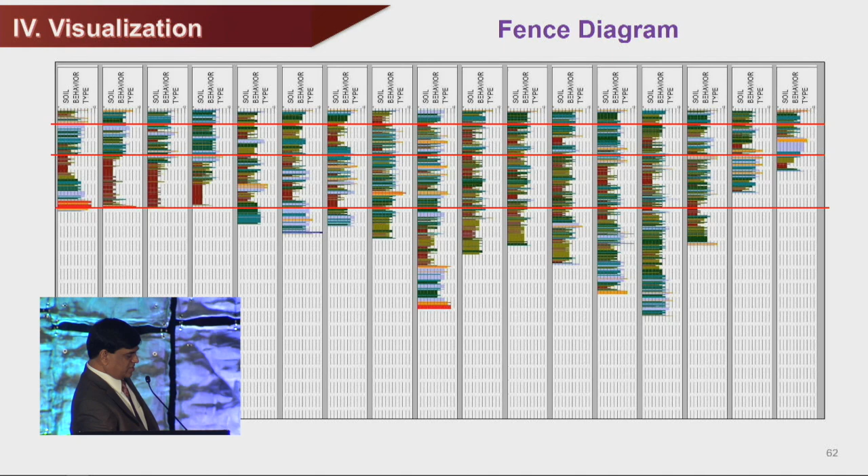So one thing we did is a kriging analysis to come up with 2D plots. We divided them into several groups because this is supposed to be 3 layers, so each of them is different. So for 0 to 5 feet, you can see we tried to do a normal distribution of the tip resistance.

There's not a simple normal distribution - same thing for 5 to 20, and then 20 to 50. There's a lot of variability, so we thought we needed to really do kriging analysis and also stationarity analysis.

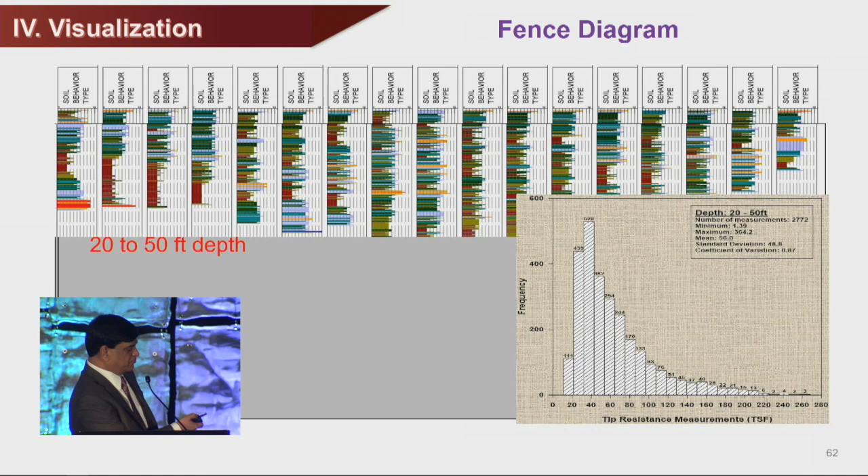So we did this - again, one of the things we did is we went back and did the variogram analysis of all the entire CPTs. From the variogram you can see the spatial variability, so we used geostatistics. Tejo did his work with this, and also Sayanthan did his PhD work on this too. So basically we completely used the variogram to do the whole soil layering.

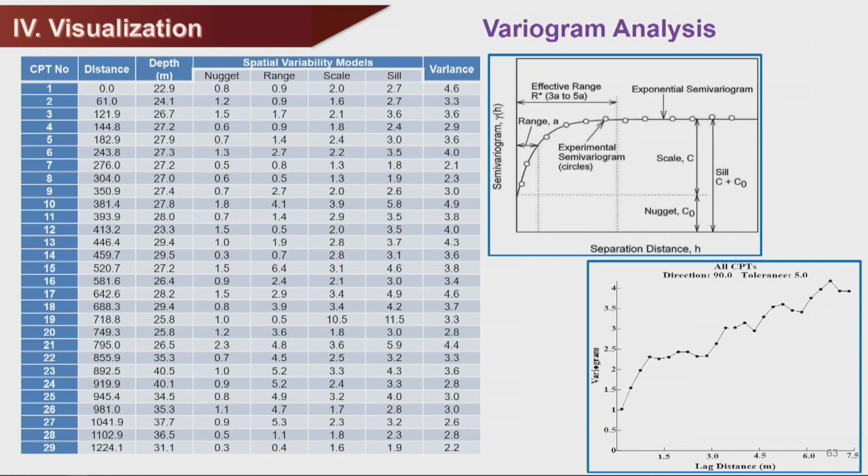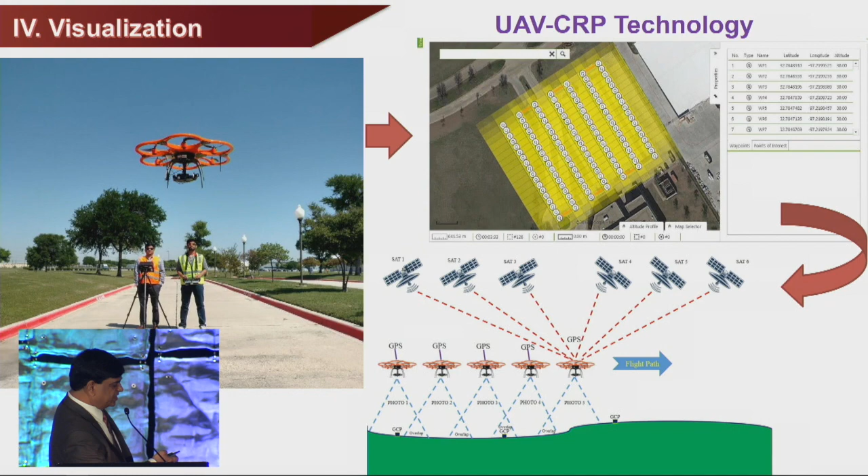So this information, just by flying, you don't have to go there. Flying along the road, collecting the data. Obviously you can't fly over live traffic - do not fly your drones on top of live traffic. But with the proper signage, you probably can do it if the DOT gives permission. In our case, the research DOT has given permission, so we're doing this, and hoping to do more. Again, we can get a lot of information that tells you about subsurface issues.

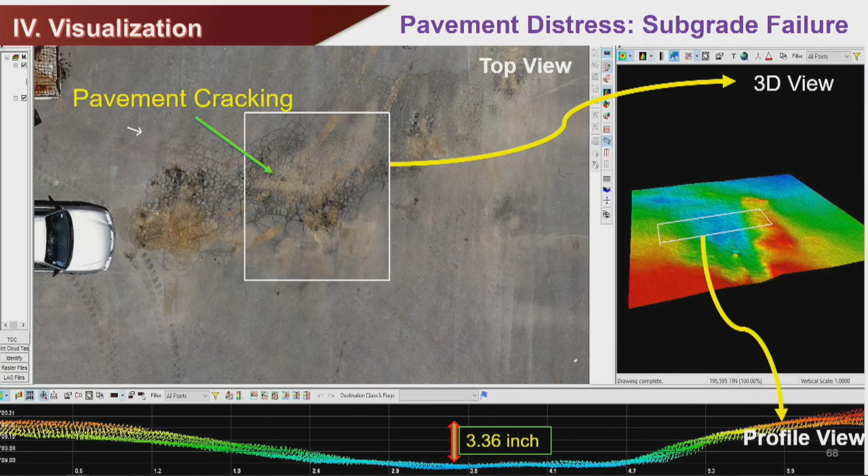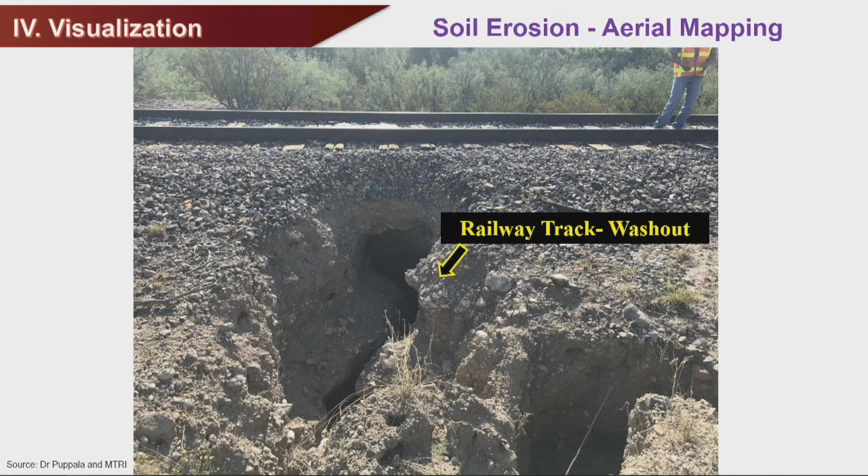We also did some nice work near Alpine, very close to the border. This is one of the railway tracks where we had to look at washouts. One of the things we see is where the erosion took place, all the nice contours - we were able to fly and build out how much void volume there is, if we can see that volume clearly from the surface. If it's too deep to be visible, obviously we can't do it, but we can tell how much area grouting we may need to fill up this area.

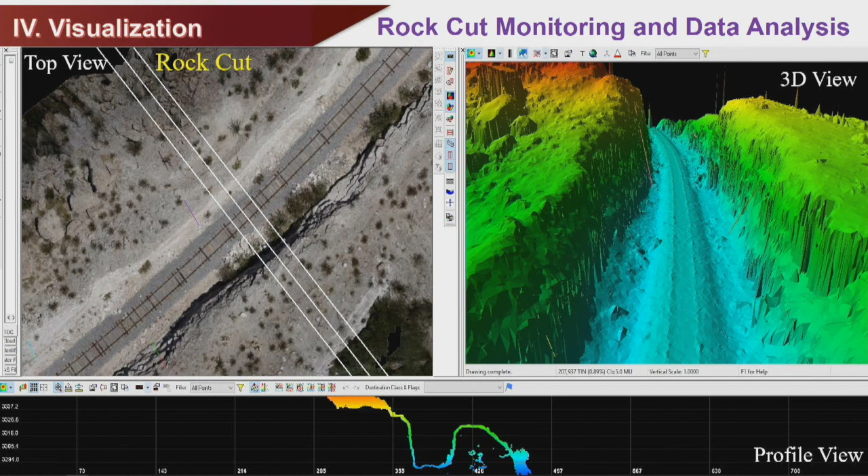We are working with a couple of softwares right now. If you know the properties of the rocks or soils you have, you can go back and design it. I think you can do landslides also, so a lot of things. This is, of course, a small height, but you can extend this to major things.

We're very fortunate with this study, and we are doing a lot more work. We have 4 projects on UAVs right now. Some are looking at transportation communication towers, another one is dams and embankments, and we're also looking at some slope issues with LSU.

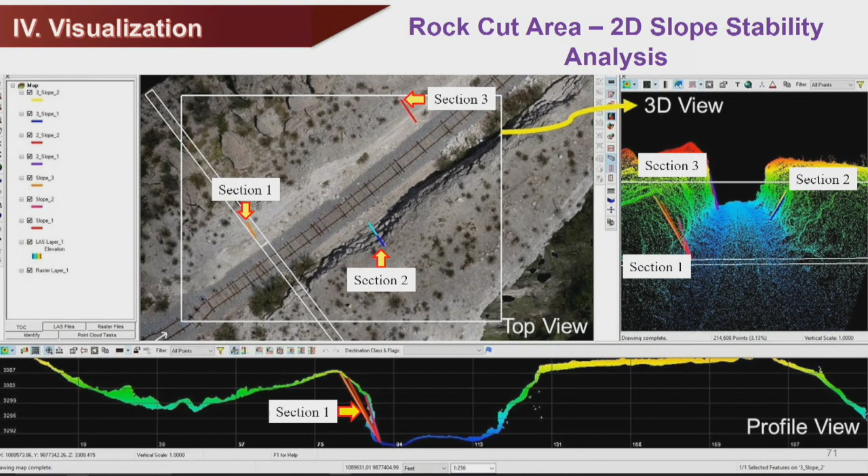So there's a lot of interesting stuff. Hopefully we'll present it. He did some analysis of the 2D slope stability, which gives you areas where the factor of safety is really critical, so you know the areas that need to be investigated further or maybe even repaired.

This is the NSF study, the rapid study. We recently started working on it. We are doing this data fusion, taking data from drones and also Twitter feeds, to come up with a better way to know which infrastructure is really affected, because a lot of times you get false information.

There's a dam breach - it's really not. People may have had to, in that hurricane time, go out and check. So we are looking at this study with the social science background professor.

Using technology and data, how do we come up with a better way to understand, so that we can provide the data quickly to the Emergency Operations Center, so they can tell the public there's no issues, the bridge did not collapse, everything is okay - that kind of information. So the drones can provide you visual data that really helps you.

So again, I think more and more work you will see - I see a lot of interesting work. We are hoping if Brad allows, we may fly a drone at next year's conference in Dallas, provided we get a space to fly.

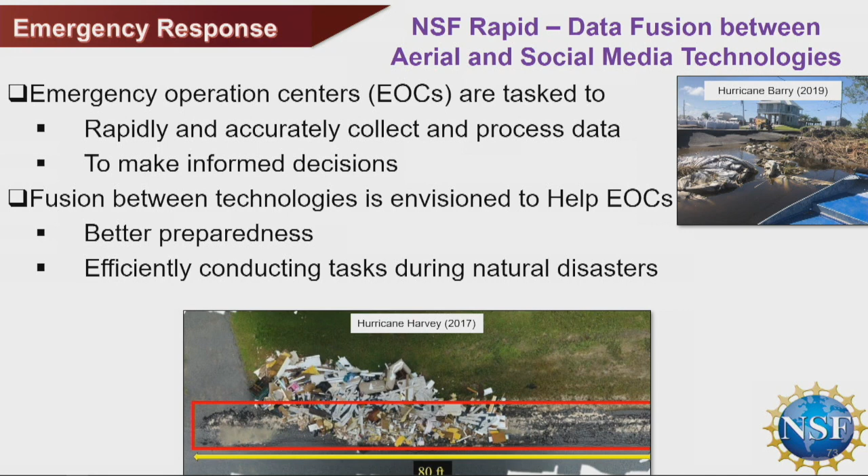So I just want to give you a summary. I live on expansive soil, I live in expansive soil, I live by expansive soil - I call them expensive soils. That's really the reason why we have a lot of issues and a lot of research, and a lot of my students really worked on several things.

We did everything from basic research with NSF to applied research with highway agencies, Army Corps, or water districts. We've been very fortunate - we've made some very good practical solutions that are implemented by different districts. One thing I want to mention in red font is what Professor Peck mentioned.

It's very important for us to do case studies. The case studies really help us understand these issues better. You can do lab work, but sometimes in the field when you apply it, you may need some modification.

So far in expansive soils we didn't have to do that much, but I can't say for sure, because a lot of times we're probably lucky four out of five times. I think geotech-wise, we are doing good.

One thing I want to mention for our young faculty, particularly the new ones, is visualization and Construction 4.0. I'm very fortunate - I'm working with a group in France, École Polytechnique Lille. They do wonderful new work with 3D printing, UAVs, sensors, robotics. A lot of these things relate to tunneling operations or using sustainable materials for 3D printing, which is geotech. So these materials, in my opinion, geotechs can play a very important role in.

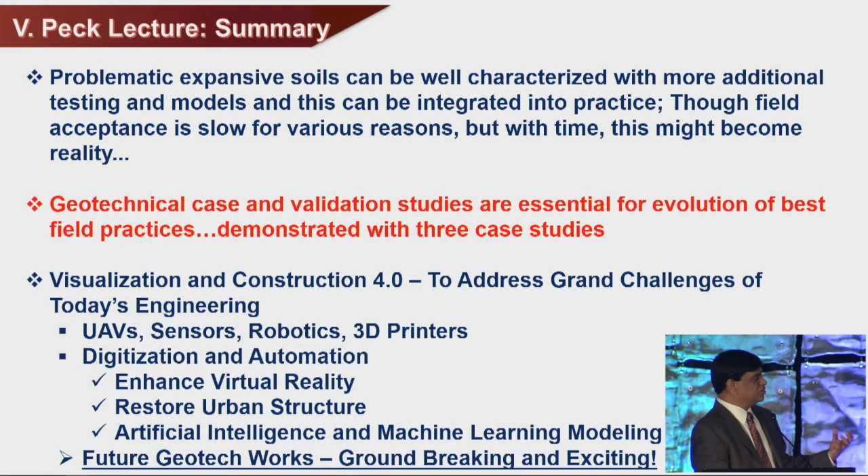All we are looking at is virtual reality to restore urban structures. You saw the visualization, using AI and ML models. So all these things, in my opinion, will be very exciting, and hopefully will bring a new industry to this Congress. That's something we hopefully will have more and more, and in our opinion it can really attract a lot of young engineers into our profession.

So I think there's a lot of groundbreaking, exciting research that's going to come up. I see a lot of work here on the energy pile, so we are very, very fortunate.

So I just want to say acknowledgements. My wife, Padma, and my kids, Anisha and Rishik, they really are the reason, because they know I spend a lot of time—long weekends—with my students, but they're very, very patient with me. Of course, my parents and my brother and sister.

And I miss my professor, Acar, Yalcin Acar. He was my advisor. He passed away just a few months before I started my academic career, in an unfortunate accident. Professor Tumay, even now I call him every month—he's about 80 plus. And again, I feel sometimes I'm half Turkish, because both my advisors are from Turkey. So I have Acar and Tumay, my thesis advisors.

And again I want to thank my EDS award committee, starting with Tim Stark. Jim Collins wrote a nice letter. Sandy Houston—I hope you guys don't regret that you wrote those letters now. I also want to mention Naveed Jafari, Tejo, Binod, and Chris Carpenter, who did this. It's really a surprise to me. I can't tell you how big a surprise it is.

I also want to talk about some of my colleagues, particularly at UT Arlington. Professor Hoyos, unsaturated soils, wonderful person. Xinbao Yu, I work a lot with him now. Professor Qasim, he was one of my mentors. My current chair, Dr. Abolmaali, I work with him a lot also.